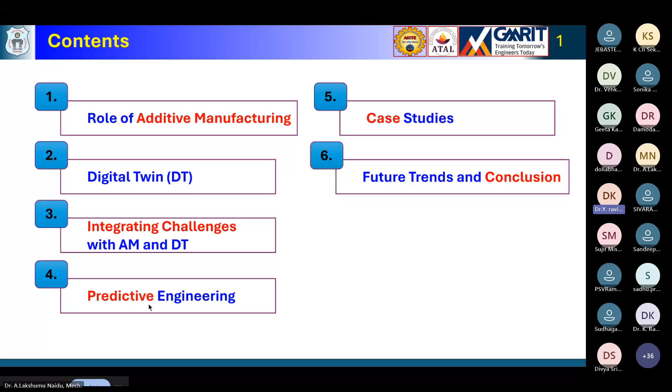If we try to see the difference between traditional and additive manufacturing processes: in traditional manufacturing, we start from a block of material and use tools to remove material until we get the required size and shape.

Please press enter, the video is coming. Can you please press enter? You entered twice. I think this is showing how 3D printing actually works.

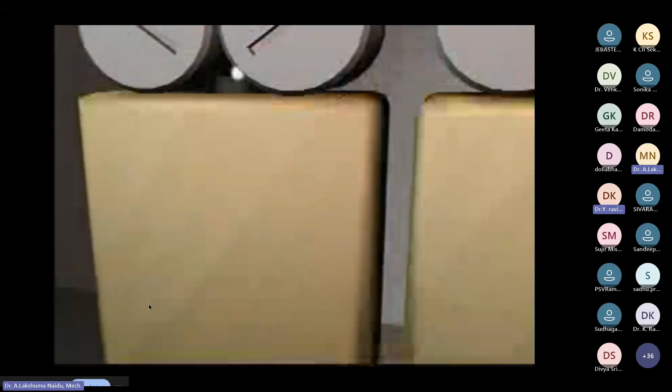Unlike subtractive manufacturing, in additive manufacturing we deposit layer by layer. There's no tool and no wastage here; you are always adding material. So in traditional manufacturing there's a lot of wastage, but not here. You can build any complex object layer by layer by taking digital data as input, and the final part will be whatever you designed in the CAD file.

So it gets fabricated, and not only that, we can use different materials here. In conventional manufacturing we always use a single material, but please press enter sir, there is one animation, one video that will come.

Please press enter once. Yes, so you see here this image. No, you pressed it again. No, go back.

So in this image you can see that you can print different materials here, depositing different materials from the nozzle, or different compositions of materials, which is not possible with traditional manufacturing. You can simultaneously produce different materials, meaning multi-structure components can be made. That is the basic difference between traditional and additive manufacturing: no wastage, and you can add multiple materials to make multi-structured and functionally graded materials, which could not be done with conventional manufacturing.

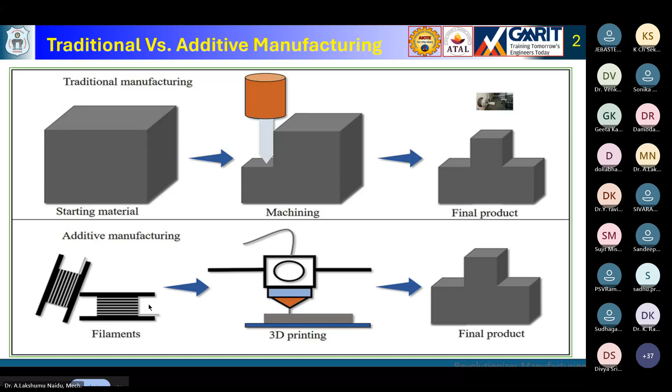This image is somewhat blurred. I don't know, but okay. Again, maybe some compatibility issue.

Additive manufacturing is a process where you can join material. Let's look at the steps involved.

This image will tell you the history, when it was invented, and the state of the art of additive manufacturing, starting with polymer and then metal, and how these components have been used in aerospace applications. The first component made through this process was during 2014, when the first AM part on a flight was printed.

Yeah, and you ఒకసారి enter ఒకసారి enter, okay, ఒకసారి enter నొక్కండి.

You can see here the various steps involved in the additive manufacturing process. We need to start with the CAD model. Whatever component you are trying to build, you go to any CAD modeling software, make a CAD model of it, and then convert it into an STL file.

That's the second step. The third step is we need to transfer this data to a software. Each machine has its own interfacing software. In the interfacing software, you can slice the model with a single click, generating the tool path movement without writing any code.

In the fourth step, you generate the machine setup or code, and it will be sent to the machine. Inside the machine, the physical fabrication takes place layer by layer based on that digital data.

The process starts from the bottom layer to the top layer. Once all the layers are complete, we need to remove the part from the machine. That is the sixth step.

In the seventh step, post-processing, sometimes we need to give supports where there are overhang portions, and then we need to remove those supports using post-processing methods. Sometimes we also need to enhance the properties of the part, which can be done through heat treatment and other post-processing methods.

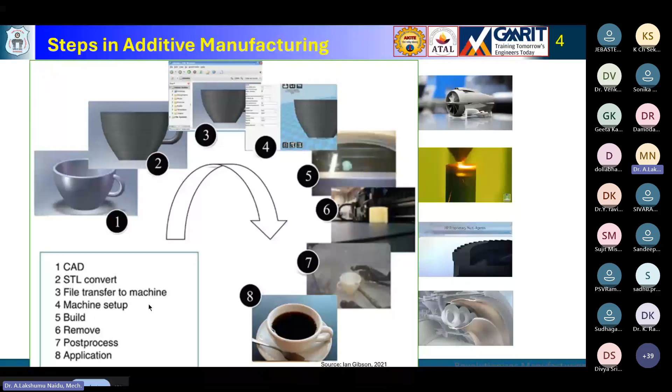Now we are much worried about the sustainable development goals. The United Nations has set up these sustainability goals. Why am I bringing SDGs here? Because we are talking about Industry 4.0 or Industry 5.0, where sustainability is one of the pillars of the fifth industrial revolution. We should not harm the environment or society in general.

For that reason, we need to meet these 17 goals set by the United Nations, such as no poverty, zero hunger, good health, quality education, gender equality, clean water, and so on.

Why am I bringing all these SDGs here? It's because additive manufacturing is going to satisfy the majority of these SDGs by not emitting carbon. So AM can satisfy majority of these SDGs, giving that kind of advantage.

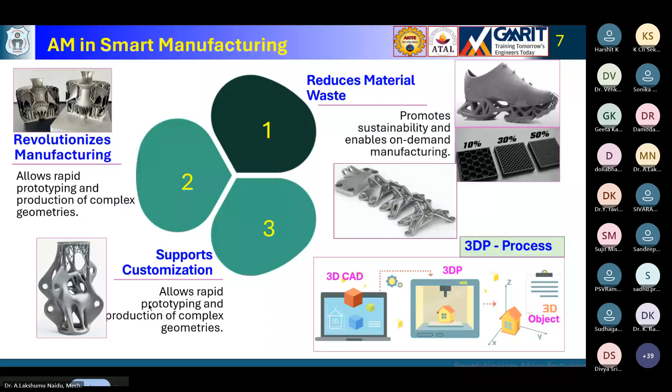ASTM classified this into 7 AM technologies, each different. Why am I saying all this? Our aim is to make a digital twin of the AM process. In order to make a digital twin, we need to understand material behavior and process parameters, because we need to create a virtual environment exactly like the physical process - for process optimization, design optimization, quality optimization, and finding defects. We need to optimize these areas, and if there are errors, we should minimize them.

If you print without correcting errors, you're still fabricating, but for AM, especially metal AM, it's very expensive - you don't have the luxury to waste money. So if you create a digital twin, you need to understand the ins and outs of these technologies. Why? Because AM cannot be generalized like conventional manufacturing methods. You have 7 AM processes, and each process behaves differently, with different feedstock material for each.

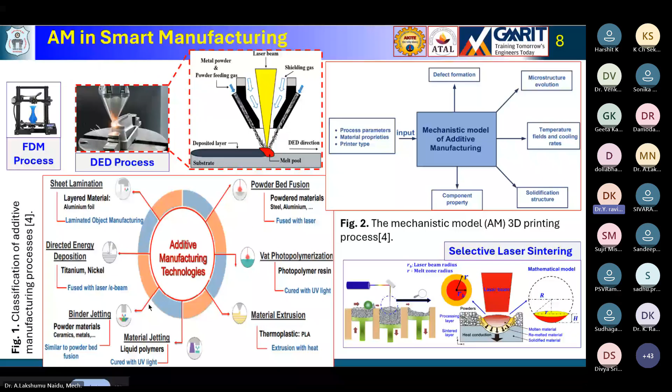So let's move to the next point. I'm not re-explaining the same processes—the idea is once you understand the physics involved in these processes, you move on to modeling them. Coming to the applications, there are plenty of applications.

The best part of AM or 3D printing is it makes more sustainable, efficient products, and enables more innovative designs. You can see this from architectural applications to structures, automobiles, medical applications, or any application for that matter.

And then, as already mentioned, you have challenges. The challenges include process variability, or the repeatability of the process. If you produce one component and immediately produce the next, there will be a slight variation in the properties. That's the biggest challenge - how you are going to tackle this.

That's what your digital twin is going to help you out identify - such process variability, or the limited predictive capability. That is another thing where we need to focus. And defects like porosity, warpage, residual stress - all these defects which we need to address.

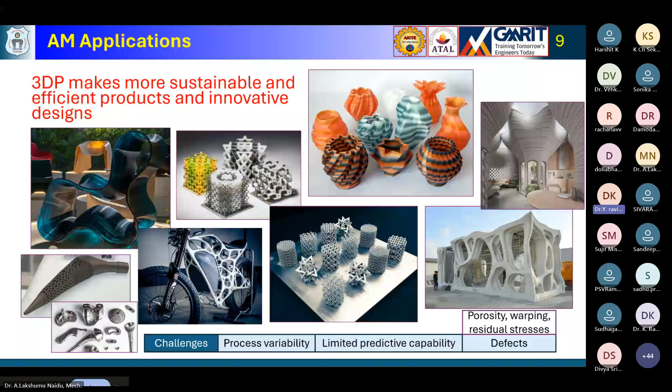So you can even try to see the redesign here. With AM, we always need to redesign the geometry. Why do we need to redesign it? Because if you are not redesigning, you are not going to get the benefits you've been talking about, like lightweighting of structures.

If you try to understand these three images, the leftmost image is a traditional design, weighing 4.6 kg. If you want to produce the same design in additive manufacturing, you're not going to get the advantage of additive - it may become much more expensive. Instead, in the second image, the middle image, you have changed your block design into a shell design without changing the inlet and outlet.

Basically it's a manifold, so without changing the inlet and outlet connections, you just change the bulk design into a shell model. Because of that change in form - from bulk to shell - you have saved 78% of weight. So weight reduction has happened.

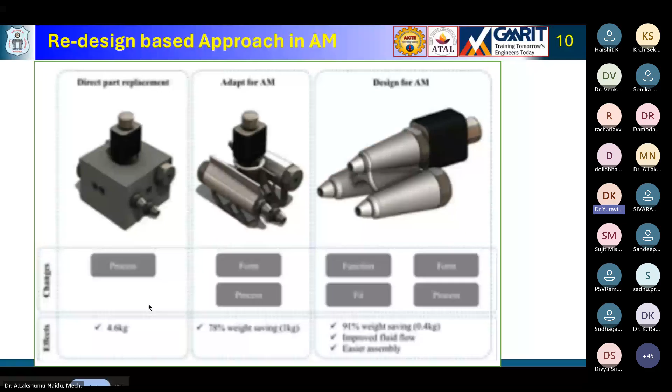So in connection with these three designs, we need to print these parts. For printing it, the same three designs: solid block manifold, shell block manifold, and optimized DFAM manifold.

The traditional design, the first one, takes 191 hours to print, and machine hour rate is say $65, so it will be much expensive. The material cost, weighing 7.4 kg, added together, total cost could be 15,000 US dollars. That is the solid block manifold.

But because of the shell design, now it can print in only 36 hours. You can complete the build within 36 hours, meaning your machine cost has been reduced, and material cost, instead of 7.4 kg, is now 1.2 kg. Your material cost has been reduced, and total cost also—you have saved a lot of money.

Then further, the third design follows some guidelines and considerations of design for additive manufacturing—I didn't talk about these, other speakers might have covered these design aspects. Once you follow DFAM guidelines, the printing time is only 19 hours, and you save a lot of machine cost and material. It's now only 0.5 kg instead of 7.4 or 1.2 kg—only half a kg. You've saved a lot of material cost also. Altogether the total cost has been saved.

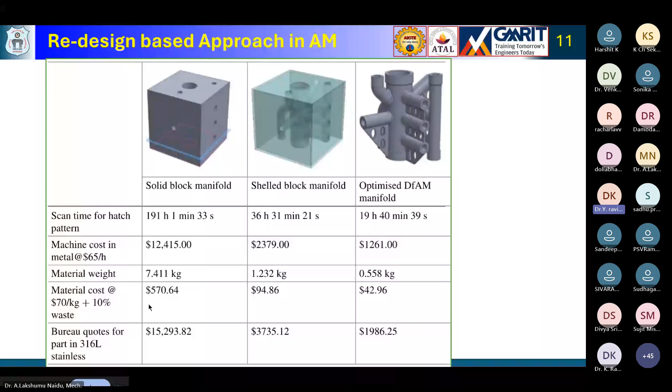So the AM magic lies in the design—not just conceiving an idea and designing it and then fabricating it, everything you can take as DFAM. Why? Because we need to know the constraints of the AM process while designing your part. Traditional designs may not consider those guidelines or constraints that AM will have. So your design should be tweaked, modified, or sometimes totally redesigned from scratch, or sometimes just tweaked here and there.

Now we'll talk about the digital twin. What is a digital twin? A digital twin is a virtual representation of a physical asset, process, or even a system as a whole, created using real-time data. That's most important—you extract real-time data from the physical object, asset, process, or system.

And then it will simulate and analyze the data, and ultimately it will increase the performance of the system through the entire life cycle of that component. That's what your digital twin is going to do.

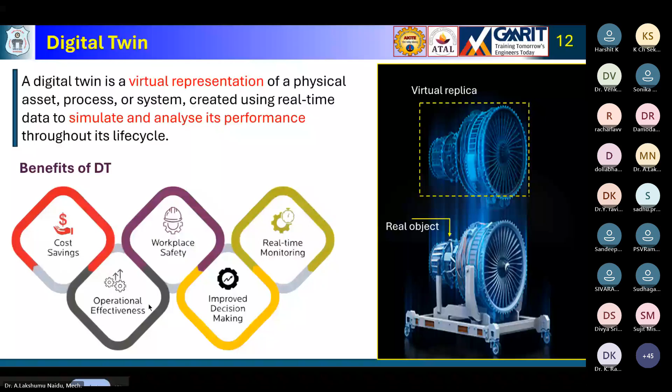In continuation with that, how your digital twin, as you know, you're going to have a real-time monitoring scenario. Your digital twin replicates the physical system as such in a digital environment, which allows for real-time monitoring and analyzing the manufacturing processes. Now in this case, we are talking about AM could be the process that you are going to integrate, and also it predicts the maintenance as we discussed.

This digital twin technology facilitates predictive maintenance based on the analyzed data. You have connected devices, an IoT system, or big data, and you can even reduce downtimes through the data you're getting. It will tell you there should be a problem, or otherwise there will be a lot of downtime, which may increase operational efficiency once you have this.

It will also enable you to do design optimization, because you are simulating these scenarios in a digital twin, which helps optimize the designs and operations. Not only design optimization, operation optimization, but also finally it will enhance the performance of the system at reduced cost. So how are we going to achieve this?

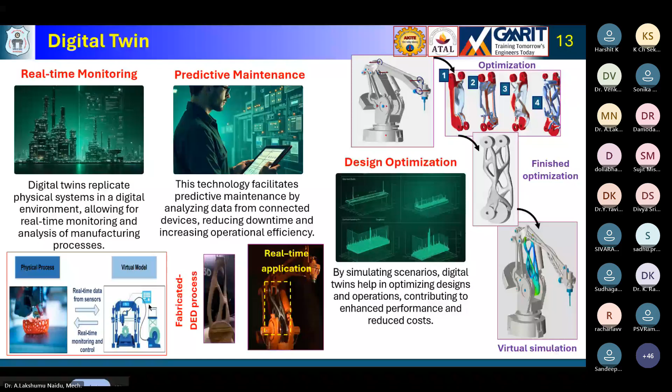There is a small video, can you play this video? Are you able to play it? Yeah. So this is a digital twin that I borrowed from Altair.

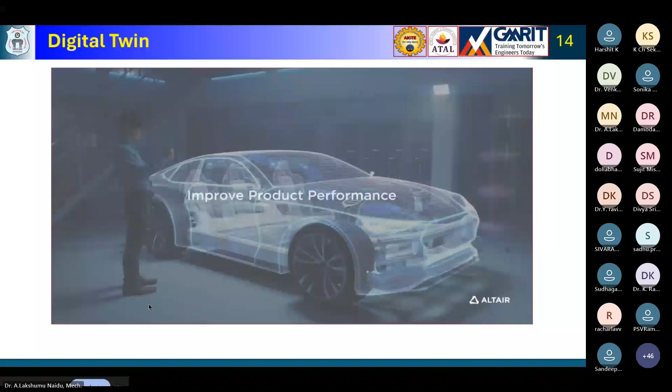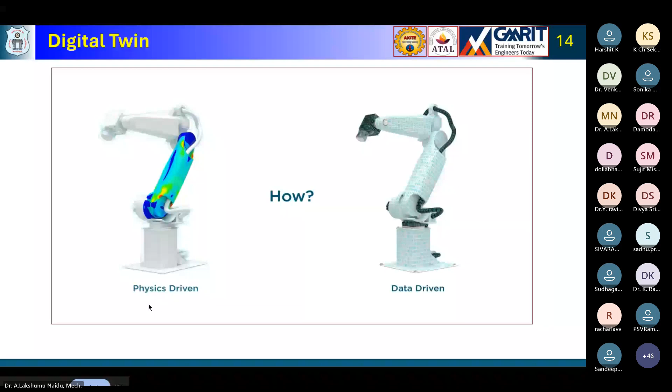So this could be... so you're going to get real time data that you will be capturing, acquiring the data, and then it will be driven.

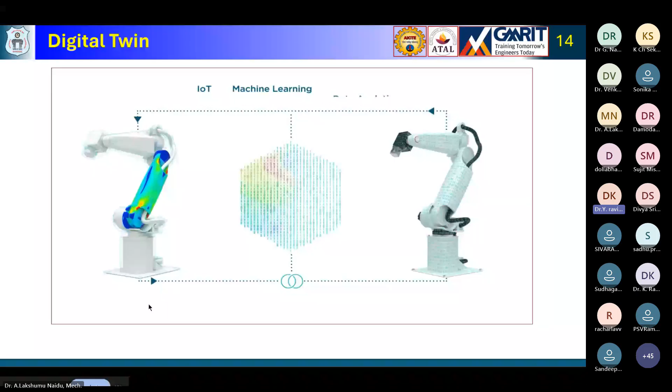So then you will be integrating the IoT, machine learning, and then big data should also be a part of this digital twin.

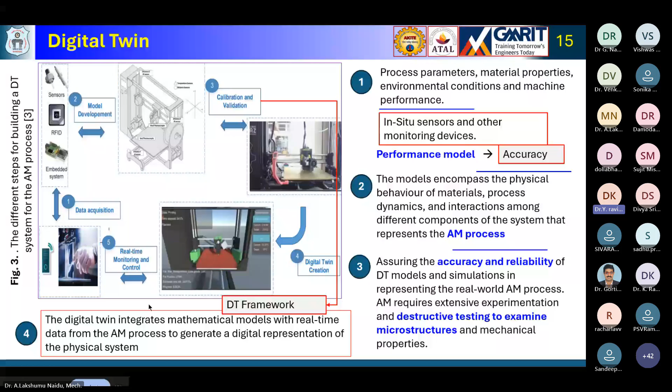In continuation with the previous discussion, you have sensing data which you will be collecting from the machine, and then you have created a model, and you will be getting the results from the model. That could be the simulated results, and your testing data is another source of data. And from the literature also you can take the data.

And then you have now big data here to classify this data, so we need to refine this data. So you got at least 4 sources: from the literature, from the testing, from the sensing source, and from the model, the simulated result. So by using big data, then we need to classify this data.

And this classified data will be sent to, now machine learning is going to play a major role here to train this model. Of course you may use neural networks and machine learning to train these models. This is not a single step you do, you always keep refining this process, trying to always optimize this stuff. So your model data and then again train data.

In this way your process variables, everything, and the sensing data, you are always refining this data, and always getting the optimized data in terms of minimizing the defects or improving the performance. These are the compliances, these are the objectives, that your system is always going to enhance or refine the performance of the system. So in this way it will work.

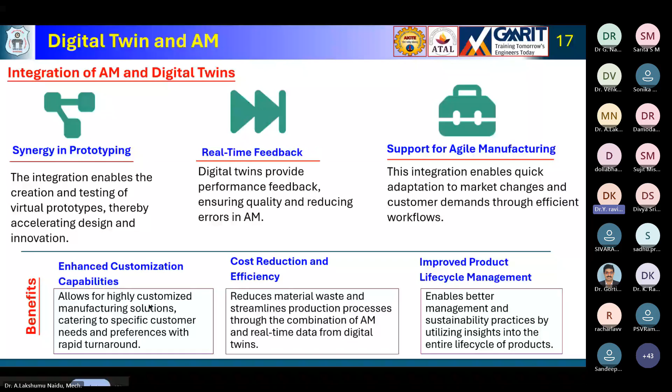Go to next. So these are some of the challenges that you should consider while adopting your approach.

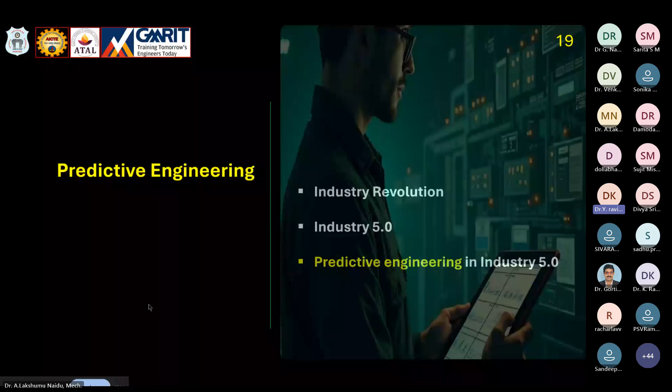And then the next part of it is predictive engineering, where you can predict something is going to happen, say once you have this kind of digital twin integrated with AM, a lot of predictive engineering will happen. That's what your Industry 5 is all about. Now we will try to see the difference between Industry 4 and 5. Right now we are in the transition, right? Basically, go to next.

Yeah, and then you try to see the industrial revolutions. The first industrial revolution, maybe mechanization, water, and steam power, that is during the 1760s. Then around 1870, maybe after 100 or 110 years, you have the second industrial revolution, mass production and electricity, followed by the third industrial revolution, computers, automation, robotics, and the fourth industrial revolution could be IoT, data analytics, and 3D printing or additive manufacturing.

And now we are in the fifth industrial revolution, rather. So it's more into human and technology collaboration, right? So that's where we need to collaborate as humans with the technology. That is very much needed for Industry 5. Go to next. So then you try to see the difference between 4 and 5.

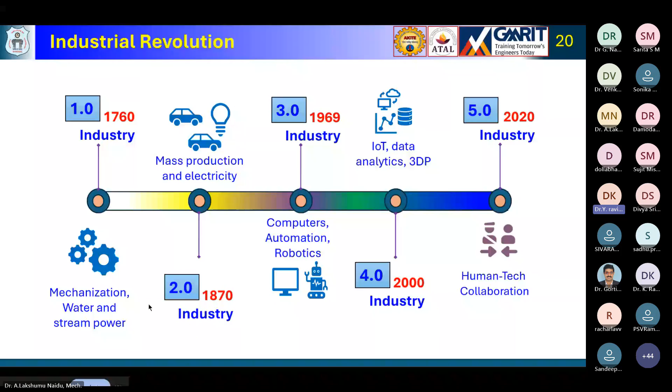So basically, industry 4 may be reactive, but industry 5 may be proactive. In terms of automation efficiency, industry 4 uses technology like IoT, AI, and big data, and it's basically a cyber physical system. You are connecting the physical and digital systems to create a smart factory, with data driven decisions being most important. In real time data, you do analysis to improve your decision making.

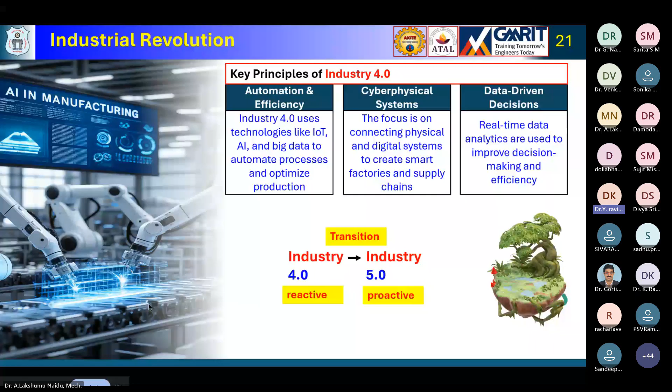Now the fifth industrial revolution talks about three pillars. The first is human centricity. People may have a misconception that if these technologies come into picture, jobs will vanish, but that is not the story. The worker is placed at the center of production, collaborating with intelligent machines rather than being replaced. So it's a human centric concept in industry 5.

Resilience is another pillar, like the flexibility and adaptability of manufacturing systems. That's what additive manufacturing is good at, adapting to changes, adopting flexibility, customization, or personalization, responding as quickly as possible to changes and disruptions. That is the resilience aspect.

The third one is sustainability. Most importantly, as we talk about the SDGs, the sustainable development goals, the sustainability aspect encourages a circular economy, covering wastage, reusability, recyclability, efficient economic models, and efficient resources to minimize environmental effects. The goal of any industry 5 product or service is to be developed in a sustainable manner that minimizes material and energy consumption for the benefit of both people and the planet. That is the idea of industry 5.

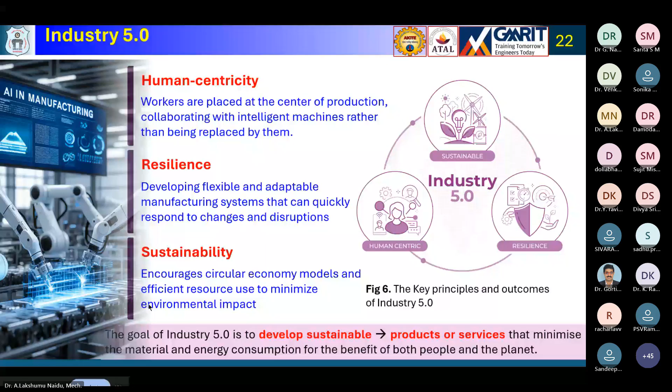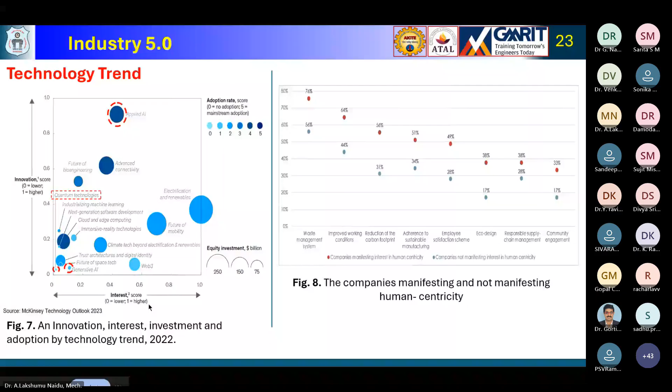And other technology should be complemented.

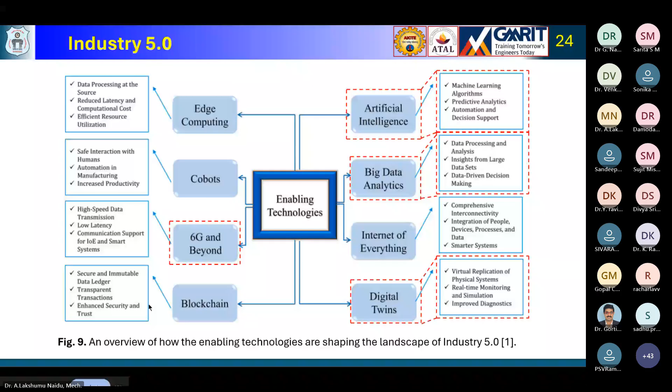If you look at traditional engineering, there's a lot of trial and error, prototyping, and then failure analysis - that is post failure analysis. After committing mistakes, then you do the analysis. But that is not the idea here.

Once you have digital twin technology, you can have predictive engineering - you can do stress strain prediction before it's fabricated, 3D printed or additively manufactured, and virtual testing, which reduces a lot of prototypes, lowers cost, and gives faster R&D cycles. Predictive engineering anticipates problems before they occur, reducing downtimes, defects, and costs - all this matters.

Your predictive engineering matters a lot, as it transforms your design into manufacturing. These are the key pillars of Industry 5.0.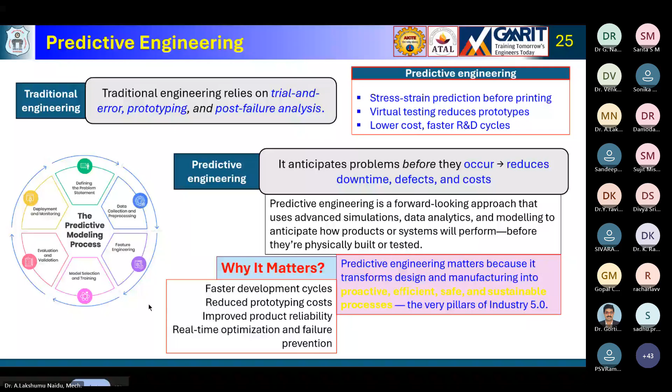So finally, we need this kind of Industry 5.0 and predictive engineering, which increases efficiency and productivity, enhances quality control, improves safety, reduces cost, and enables sustainable manufacturing.

The applications where you can apply this are robotics or cobots - collaborative robots, artificial intelligence, IoT, AR, VR, and digital twin, and of course 3D printing or additive manufacturing, where you can make use of these things.

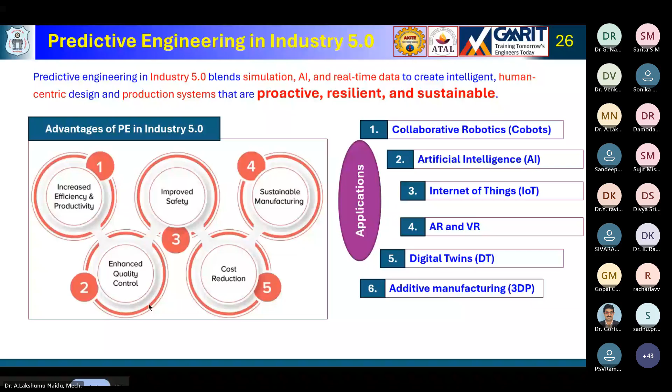Try to understand these three: deep learning, machine learning, and artificial intelligence. Deep learning could be a subset of ML, and ML could be a subset of AI.

I'm not going deep into the ML aspects, but basically you may have supervised learning, unsupervised, or reinforcement learning - that's the basic idea. Then for machine learning, you have data types - structured and unstructured data - where you train the data, send it through a machine learning algorithm, and build a logical mathematical model for prediction and output.

This is a typical representation of the kind of learning system that you can adopt.

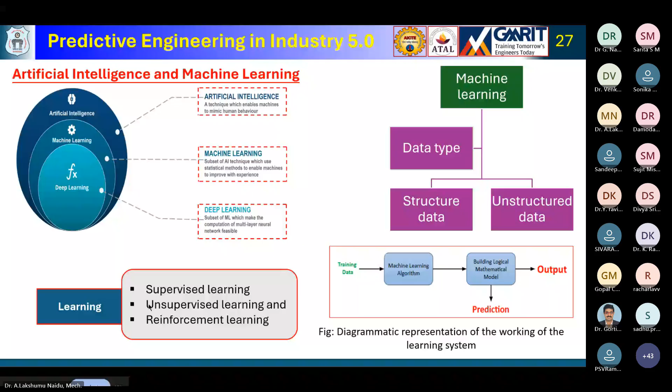Now we'll see some case studies, starting with aerospace and defense, where you have a lot of weight reduction, taking advantage of lattice optimization that can be done through topology, lattice-based design, followed by additive manufacturing. If you add a digital twin to this, your flight-worthy parts require strict processing, qualification or certification, which ties with predictive maintenance of AM, enabling digital inventory.

This is a famous case study from GE. It tells the story about these concepts.

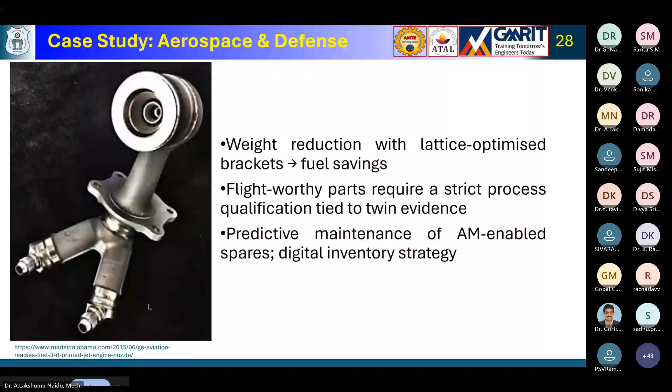In the automobile and mobility area, tooling and fixtures can be printed on demand - that's the biggest advantage you get. You can also do ergonomic customization, thermal management like heat exchangers which you can optimize with digital twin, and short run personalization and motorsport with rapid iterations.

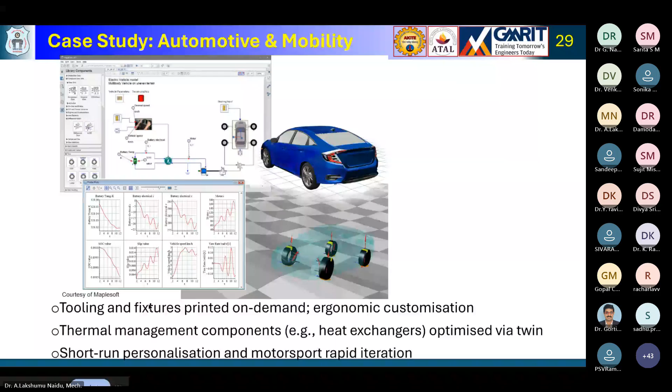In medical healthcare and medical devices, one of the advantages of additive manufacturing is a lot of customization and personalization. Patient-specific implants and guides can be designed, developed, and twinned for fit and load paths, with porous structures to promote osseointegration - you can adopt a lattice design to promote osseointegration of the implant against the surrounding tissue. Surface roughness control, UDIs, biocompatibility, and validation documentation can all be done via the digital thread.

This will enhance the traditional healthcare or medical device scenario.

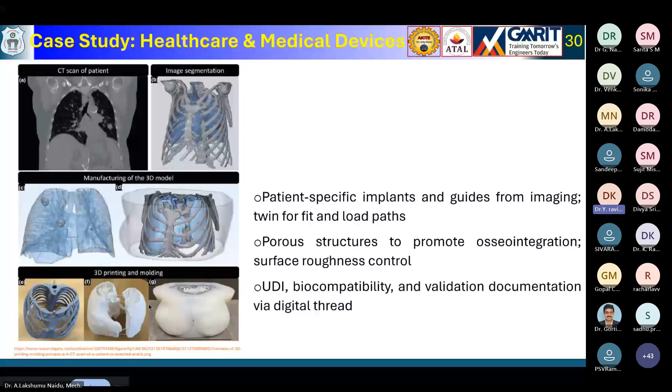In energy and industrial equipment, you have turbo machinery components with conformal cooling which adds efficiency. The conformal cooling channel is the ideal, unique advantage of additive manufacturing, which can print conformal cooling channels rather than traditional cooling channels.

Also, repair and refurbishment of these components through DED and digital twin guides the deposition and heat input, allowing you to predict a lot of defects and avoid them in the digital twin itself. This saves costs by predicting defects before printing a faulty part. Condition-based maintenance and spare parts at remote sites are also achievable with these applications.

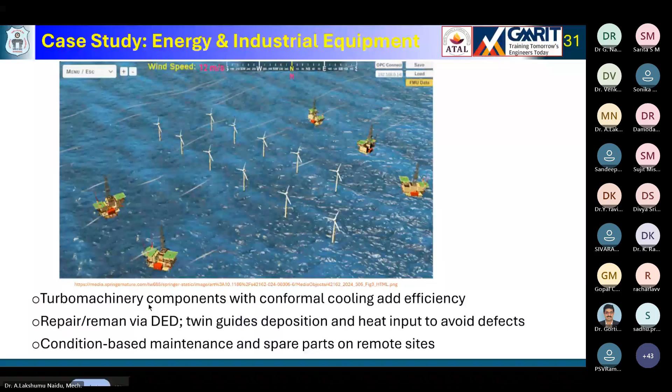Let's go to the next one.

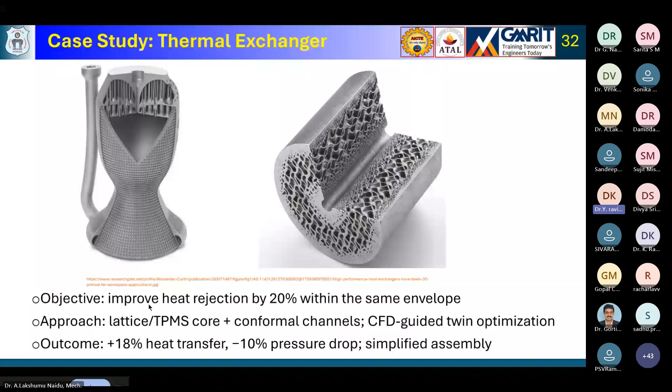Let's go to the next one.

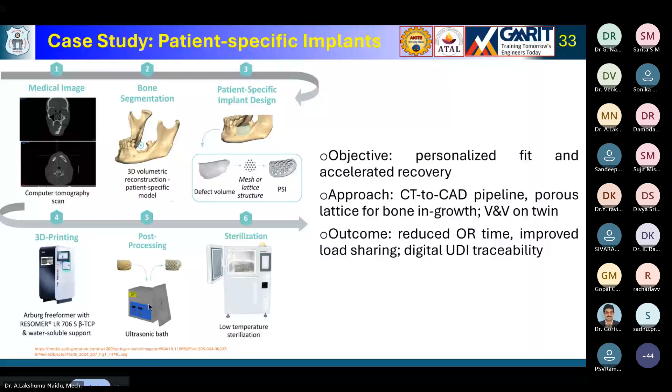What could be the future? AI and machine learning can also be an integral part of this, for greater integration of 3D printing or additive manufacturing with the digital twin, for a much smarter manufacturing system.

And sustainability focus, maybe innovation in materials for 3D printing, which will minimize the environmental impact. So your manufacturing transformation, where AM or 3D printing combined with digital twin technology, makes manufacturing much more efficient and much more personalized.